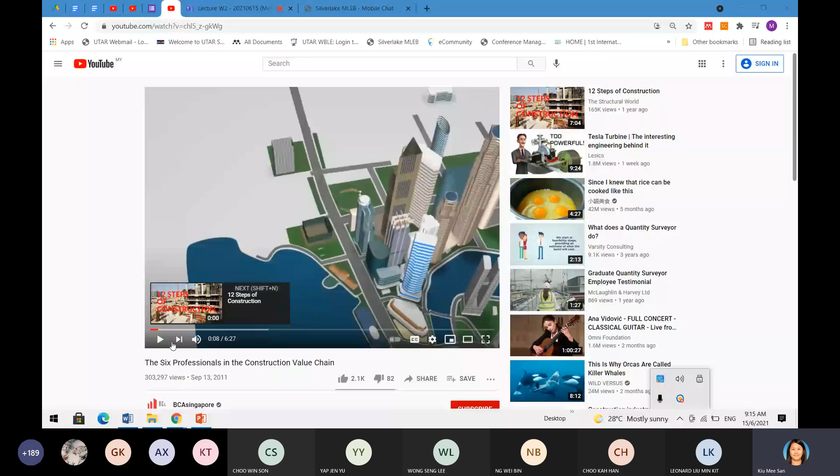In Singapore, every building you see is the product of hard work by professionals in the architectural, engineering and construction industries. Modern buildings tell the story of Singapore's development, charting its transformation from the slums and squatters of yesteryears to the vibrant cosmopolitan city-state that we see today. The construction industry not only creates jobs and drives economic activity, it also makes Singapore one of the best quality and most sustainable cities in the world to work and live in. The growth of this industry is supported by dynamic, innovative and passionate professionals who take on challenging tasks and responsibilities in bringing about the best built environment for our people, as well as delivering green buildings that preserve the environment. But the jobs are also incredibly fulfilling. Every construction project requires close coordination of a team.

The architect is the grand designer who creates the form or body of the building. A building usually begins with an idea or a concept in the architect's mind. But the architect doesn't just design, she is the one who transforms the specifications from the developer into a working blueprint. She makes sure that the building complies with the regulatory and technical requirements, while keeping in mind the primary considerations of materials, functionality, aesthetics, and the environmental impact. But the architect cannot work alone, she needs to work with others to translate her master blueprint into a physical building.

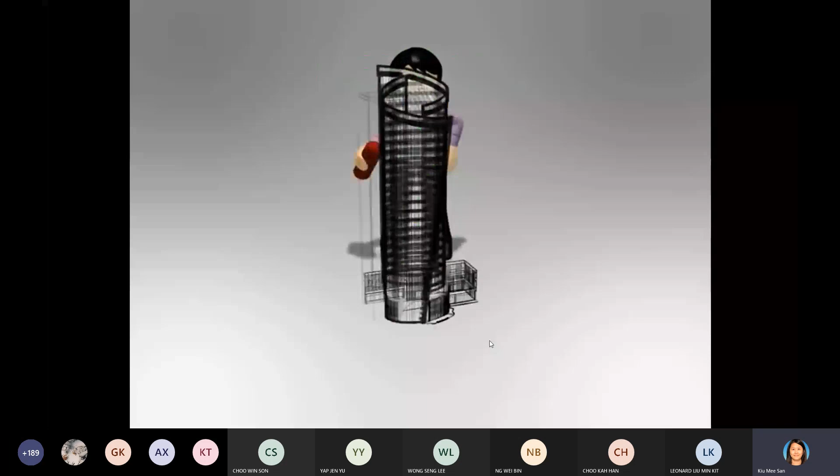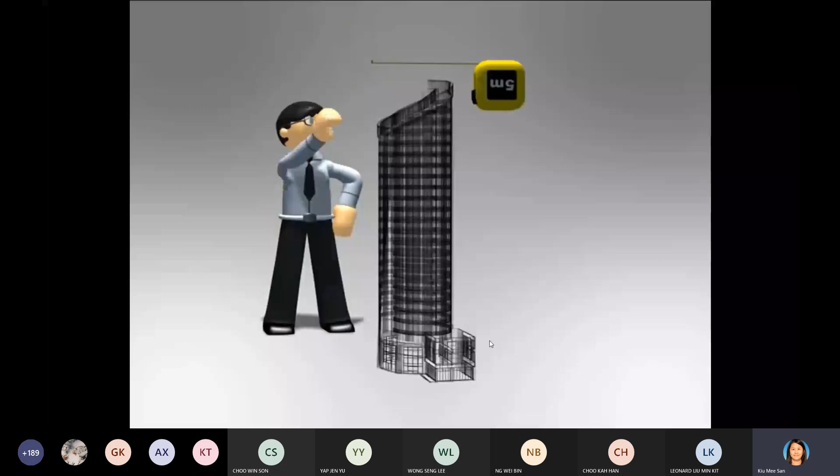The civil and structural engineer is the math and science whiz that produces the structural designs, setting the bones and joints to form the body of a building. A C&S engineer needs to decide how to build a solid frame and determine the location and size of every beam and column in a building.

He also has to make efficient use of materials to construct the building in an environmentally sustainable manner. In other words, a C&S engineer is responsible for creating a practical and safe structure that can withstand anything the weather might bring: the wind, the

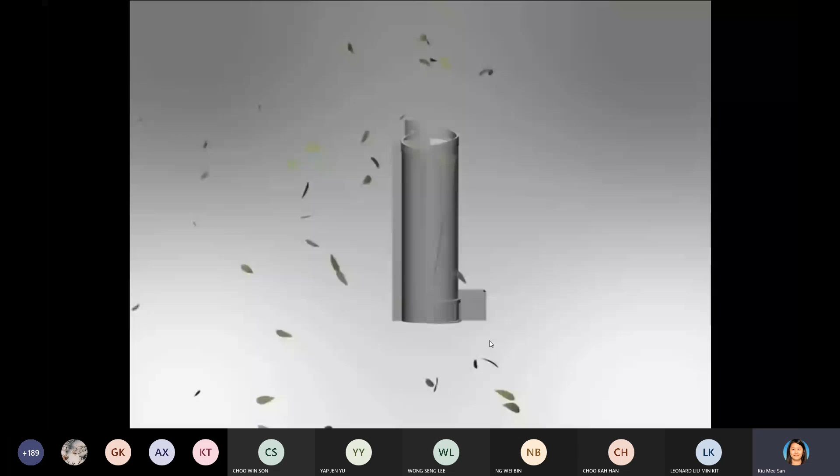sun, the rain, and the temperature changes. While a C&S engineer is the structure specialist that sets the bones, our M&E engineer is the expert responsible for connecting the veins, injecting the life force that brings a building into being. Every modern building needs electricity, lights, air conditioning and ventilation systems to become a living, breathing, habitable place. Our M&E engineer is the person that takes care of that, making sure of the efficient use of energy and water and quality indoor living.

For every project, there must be someone to take care of the money issues. The quantity surveyor is the one that manages the costs of a building project, from the initial calculations to the final figures. She must be skilled in the balancing act, analysing the numbers, assessing the risks, and preparing the tenders and contracts. That's a critical role, consolidating all the information and numbers to come up with the tender specifications and contracts. All these while ensuring that everything meets the required standards and quality.

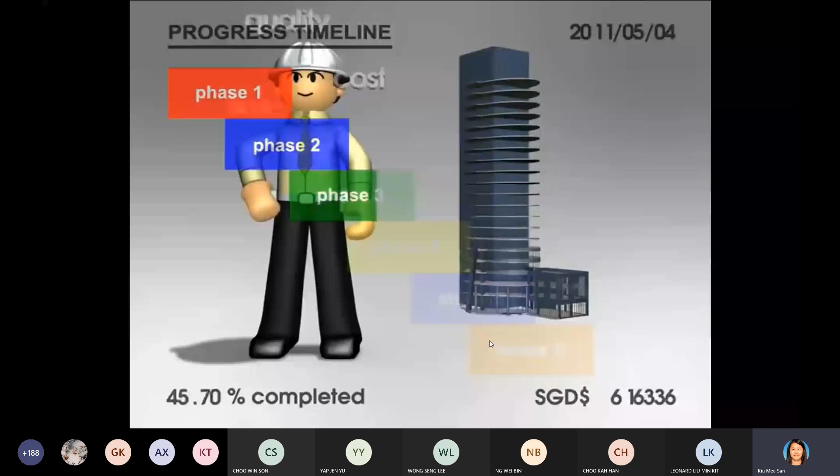As the actual construction starts, someone has to ensure the smooth running of the project. The project manager's work revolves around three very important elements: time, cost, and quality. He becomes the key overseer once construction work begins, organising the resources to turn plans for a new building into reality. That means planning the time frame for all the necessary tasks, getting the project started from the initial stage of drafting to the final coat of paint, and to ensure that a project gets completed on time and within budget.

So the building is completed, the people have moved in, and the work is done. Or is it? Buildings are built to last for many years, some surviving several generations. But proper maintenance is necessary. The facility manager is like a doctor who performs regular health checks on buildings to ensure they are well maintained and in tip-top condition. Like a good caretaker, a facility manager looks after the needs and interest of the building and its occupants, and comes up with ways to continually improve a building's amenities and services.

That's to make certain that a building stays healthy and its occupants happy. These 6 professions form the core of a typical team in the construction and building industry. Together with many other unsung heroes, they are responsible for building the roofs over our heads. All this while taking care to preserve our environment and resources for our future generations. As the industry continues to grow, there are plenty of opportunities available for all talented and creative young people to join the sector and be satisfied with a career that makes a difference. Together, let's build a green future.

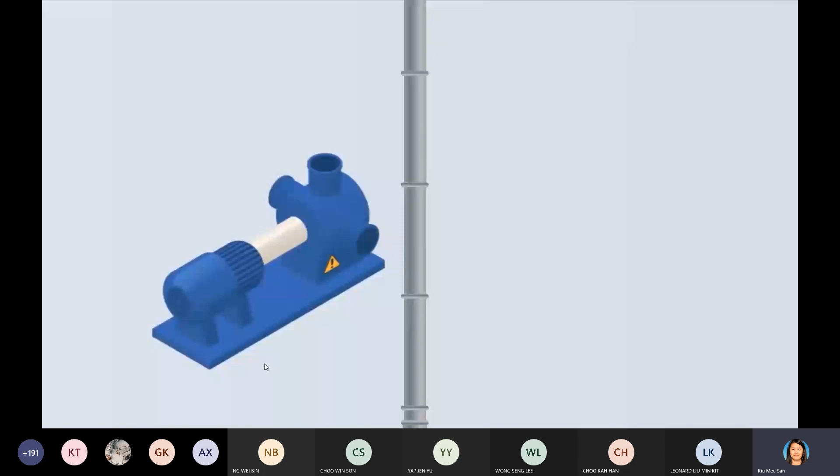Here's an example. Let's imagine you're buying a new pump. There are lots of options out there. All pumps of the appropriate size and power seem to do the same job, which is pump water. So why not just buy the cheapest one and save money for something else? Because what you really want to be thinking about is the cost of moving water over a period of time.

A pump costs something to purchase. Then there's the cost of installing it, the average cost of maintaining it each year, the average cost of the energy needed to power it each year, the average cost of repairing it each year, and the cost of removing it at the end of its life. If the pump lasts for 20 years, those costs look something like, whew, that seems like a lot.

What if we go with a less expensive pump? Can we get our costs down? Let's see. So this pump costs less to purchase, and then there's the cost of installing, maintaining. The average annual energy cost to operate it is higher because it's less efficient, and then you factor in repairs and removing it.

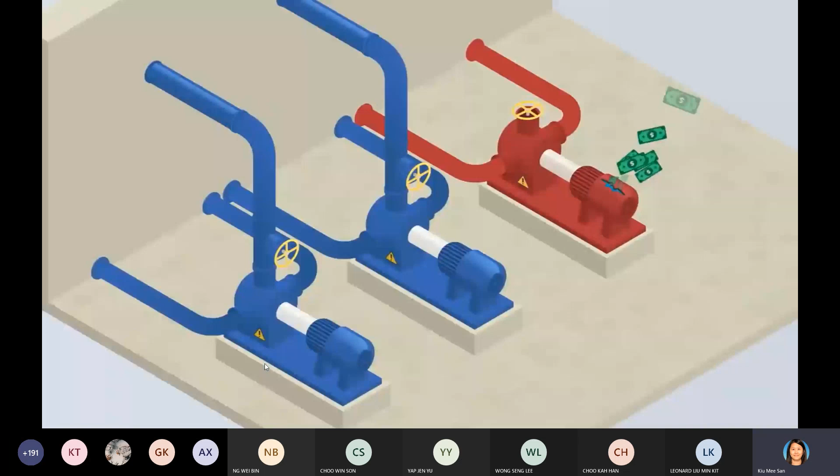If the cheaper pump lasts for 20 years, those costs look something like, so the less expensive pump actually costs us more over time, and that has an impact on the entire system. There will be less money for other system needs. In fact, most of the life cycle cost of a motor or pump is the energy to power it, even though the tendency is to purchase based on upfront price. Not only will the more efficient asset often cost less in the long run, but lower energy use means lower heat and therefore often longer life.

So it's worth taking the time to pick a pump or other asset that will cost you the least over its life, even if it costs more upfront. So in purchasing an asset, it's wise to think about the long term. Paying attention to total cost of ownership helps systems avoid unnecessary expenses in the future and frees up money for other priorities. To find out more about life cycle costing and other financial tips for your water system, visit efcnetwork.org.

Okay, so that is on the life cycle cost. You can still look back at the video later.

Meaning at the end of the life of this project, of this building, you have to face a demolition, right? Okay, so you can see that for a building life, right?

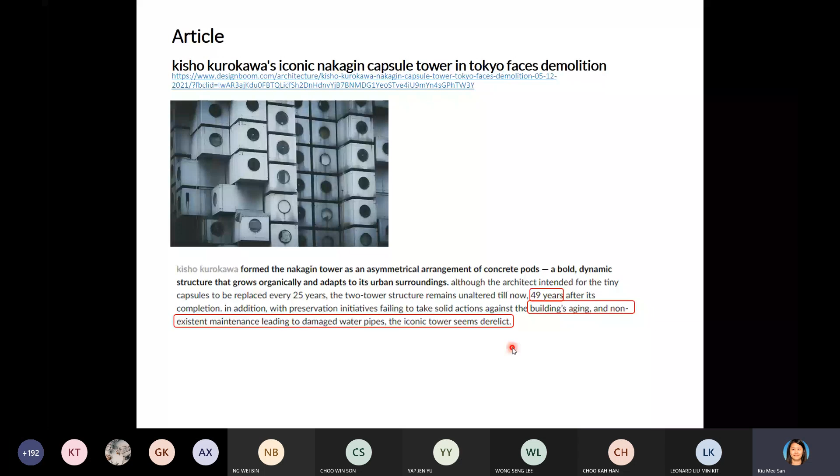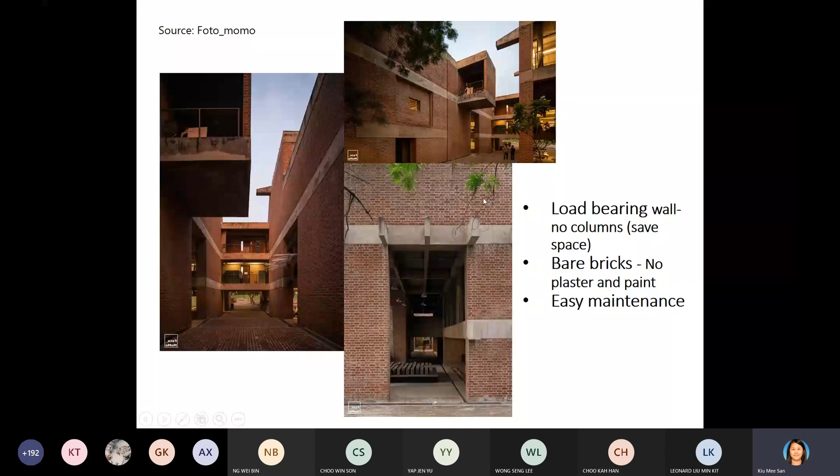Okay, so we go to item 6. Let me check. Okay, we still have a few slides to go. Okay, we continue. We continue item 6 next week. Item 6, 7, 8 next week.

Okay, we proceed to this first, the quiz. I need you to do this interactive quiz. It's just something to test your understanding on value management. Okay, so you will have to watch this video and then fill up the Google form.

I will paste the link here. Paste the link here. Okay, you fill up this Google form after you watch this video. Okay, so enjoy this video.